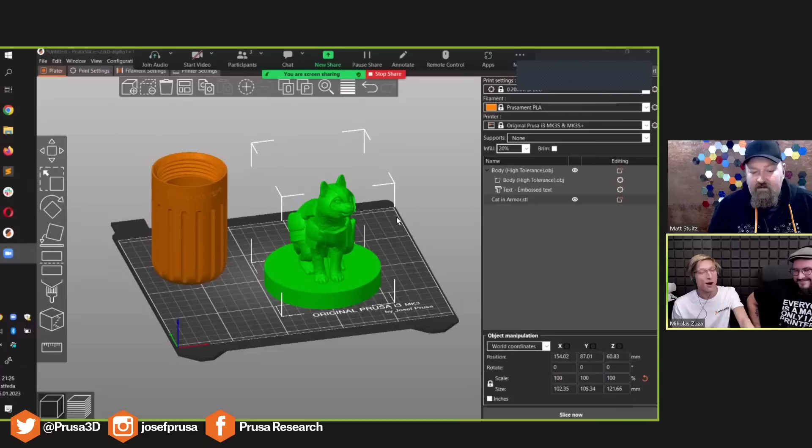So I guess while I'm showing that, when do you think the 2.6 will be released? Like maybe as soon as Friday. Our typical answer, Friday. But yes, Friday. For real, it could be as soon as this week, which we are really looking forward to.

I think I've teased it somewhere, but the cut tool used to be just move the thing up and down. But now you can even rotate it freely. My favorite is just to hold the shift key and draw the line, which is great, a plane perpendicular to that view. That's a really easy way to cut at exactly the angle you want.

And then you can click add or edit connectors. You can even add some aligning pins, and you can even change the tolerance of those. Oh, there's some extra things, size. Oh yeah, here's the tolerance and the shape. And yeah, there are even two different styles.

Anyway, the really nice thing is that directly in PrusaSlicer you can create these aligning pins so that it's easy to put the thing together. Nice, it's amazing, that's fantastic. Yes, I mean that's the cut tool everyone wanted forever. Oh interesting, yeah, so these are the different connector styles, but the lower part you shouldn't have it flipped.

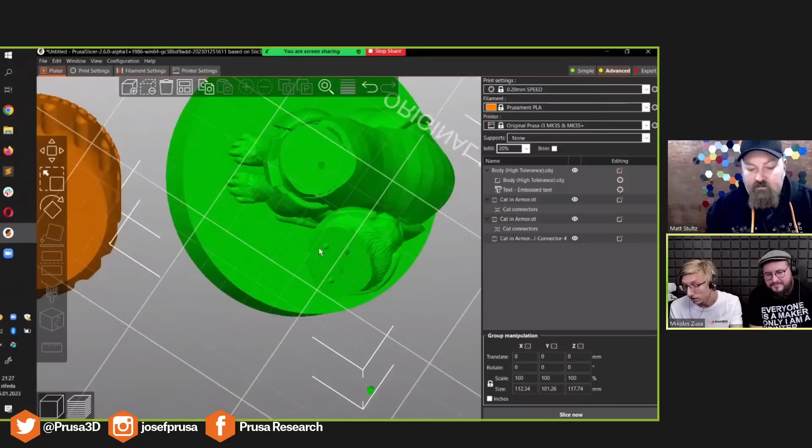So that's one thing. We also teased the text tool, which I think will be a complete game changer - that's the proper way to do text. Since we last showed it, we've reworked the UI because before it was like a functioning prototype. It was usable, but not very user friendly. And some small things changed.

For example, there's now this white cursor, if you see it, showing where the tangent to the surface is being calculated. So if you want to position your text on an edge of something, you don't have to move your mouse and wait for a moment where it changes the angle - you can just watch this cursor. And the UI is now much nicer.

You can see whether the text is being added, subtracted, or used as a modifier, and you can still make it just follow the curved surface. So that's the text tools.

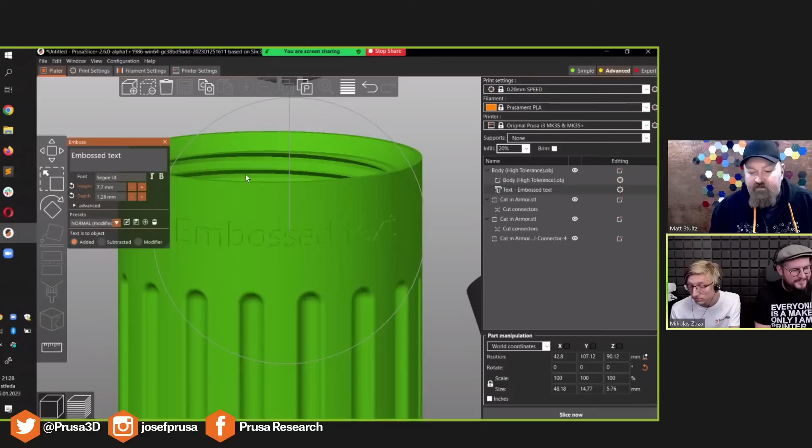I mean, everyone who does CAD can vouch how annoying it is to do this in any freaking CAD. Mickey and I were just having a conversation about how much better the UI on this tool has become, even over the course of this time. It's really getting great.

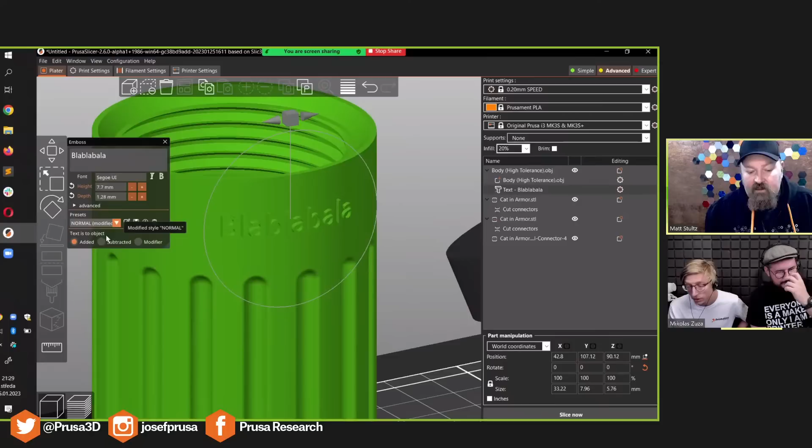You have these presets which you can create at the bottom. So when you select the font, the height, the depth and everything, you can save it as a preset. So if you're doing the same text on different models over and over again, you can just save it and recall it later on, which I think is really nice.

I'm looking at the questions - you can use any font you have in your system. Any TTF font. Yeah, so any symbols, you can use it for a lot of stuff.

Exactly, so you can do shape fonts, weird fonts for all sorts of situations. So this opens up a lot of options.

I'm also looking forward to the modifier option, because the one obvious thing that came to my mind was using fuzzy skin with the text modifier. But you can do no infill, no perimeters, and just infill. I'm sure you guys will come up with many other things to use it for. Looking forward to that, hopefully coming out maybe even this week.

Oh wow! Yeah, I'm super excited about it - pre-alpha, alpha.

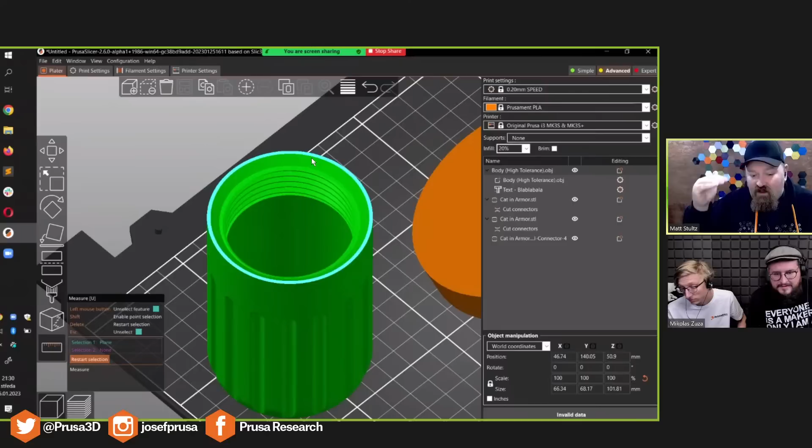I'm excited about the measure tool too. I know that's not quite as sexy, but I just used it on a project I was working on where I wanted to do a color swap and wanted an idea of where different features inside the model were, to set the color swap up in certain ways. Being able to measure that out and then divide things so I got more even swaps was really nice.

The craziest thing about the measure tool for me is detecting diameters and circular shapes out of triangles. If you look at the shape representation in a text file like STL, that's a complete mess - how do you detect a circle out of that? That's really impressive for me. It is.

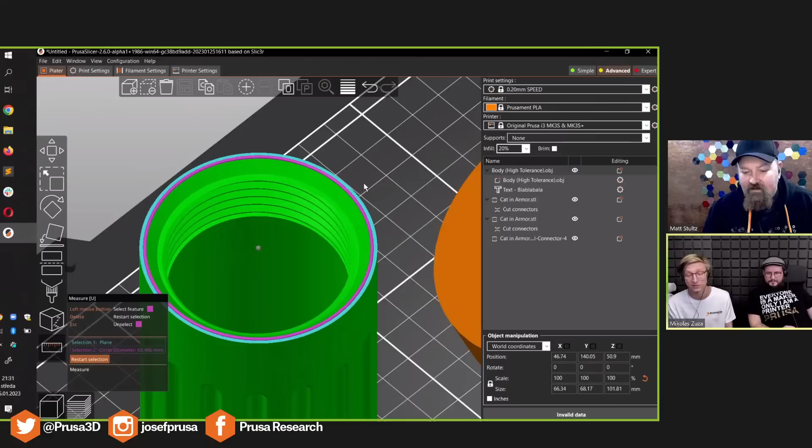It's very great, and there are tons of other things - I don't know, from the top of your head, maybe the overhang thing? Yeah, you want to talk about that?

I don't have the changelog in my head, but I think there's also a possibility to lift where the nozzle just goes around it, if you're doing travel moves. Oh okay, cool, so you don't catch the model.

That's really nice, and it's like a Z-hop kind of thing. It's smart - it just goes around because you don't know how much it lifts, but it's different when you're going inside the model and doing the perimeter slowly.

And we're just glossing over something we already talked about a lot, but I guess arguably the biggest feature of PrusaSlicer 2.6 are organic supports. Organic supports, yeah.

I have seen something that Cura is now going to put in the final release. The updated one - they also reworked their supports based on the same code as what we started with, like a year ago or something. The excellent work of Thomas Rahm.